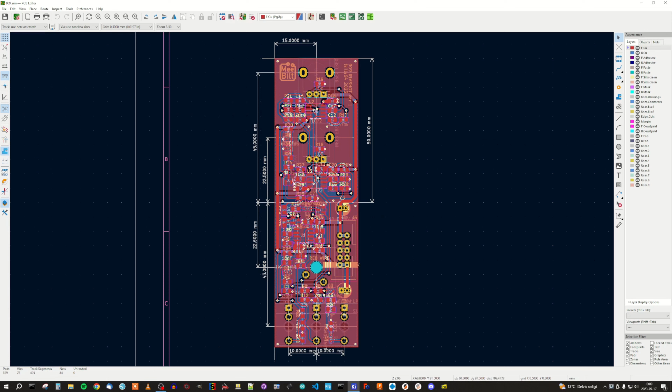And in this episode, we will continue with the front panel. And to do so, let's start by bringing up the design of the board, or the PCB, again. Alright, so I wanted to show the dimensions here of the PCB. This is something that we established earlier in episode 3, I think, floor planning. And let's just highlight the mechanical dimensions here.

Here we have a center point defined. We have 15 millimeters from the left board edge, and we have 50 millimeters from the top, and this is the center. And we will use that as a reference when we make the front panel. Every dimension to the pots and to the key and to the jacks, they are referenced against this reference point here. Okay, so let's close this one.

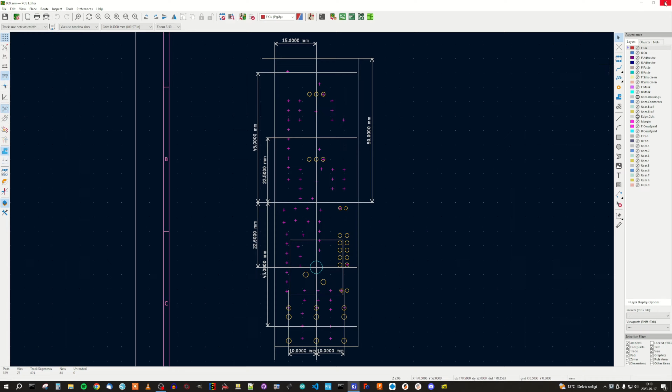And we will create another one. New project. And we will place it side by side with the 909 Rimshot main PCB. Like so. And we open the PCB editor. So here we have a blank sheet that we can use for the front panel.

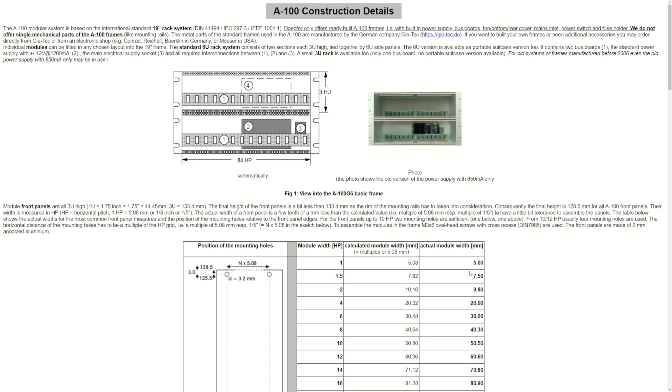All right, before we start, I would like to mention a couple of words about the dimensions of the front panel. And as you can see here on Doepfer's homepage, they say that 3U equals 133.4 millimeters. But in order to make it fit, if you have a card cage that has rails on the top and bottom, which basically everyone has nowadays, the final height is recommended to be 128.5 millimeters.

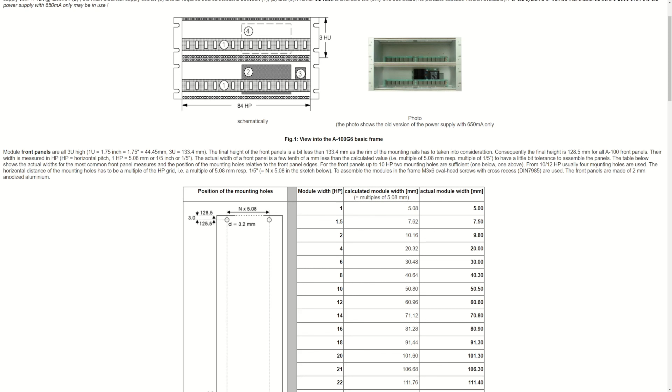And I use a slightly different dimension. I use 128.0 millimeters. And the reason for that is one of my DIY cases, the dimensions didn't get completely correct. So in order to make the modules fit perfectly, I had to make them half a millimeter shorter. But that is not a problem for professionally built cases or if you DIY something using pre-made rails. You can see here that there's a difference between the calculated module width and the actual module width. So in our case, we are using 6 HP, so our panel should be 30 millimeters.

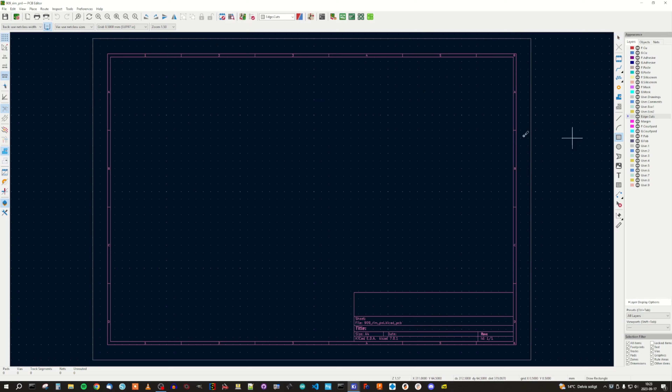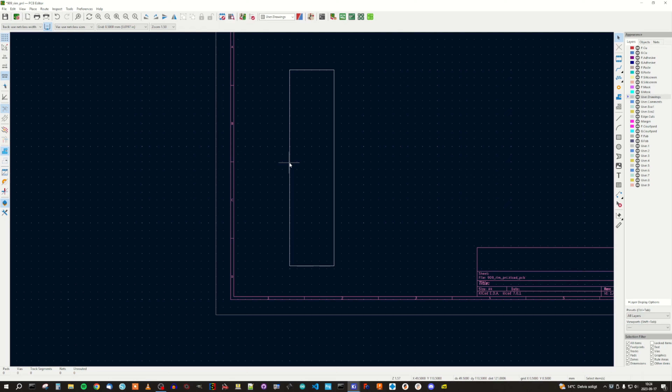All right, so we are back into the PCB layout again. So we are going to start designing the front panel, and we will start with a board outline, which means that we will select edge cuts, and we want to draw a rectangle that is 30 by 128. So this is what our panel will look like. And the next step is to basically copy the dimensions from the drawing I showed you earlier on the main PCB. So let's start doing that.

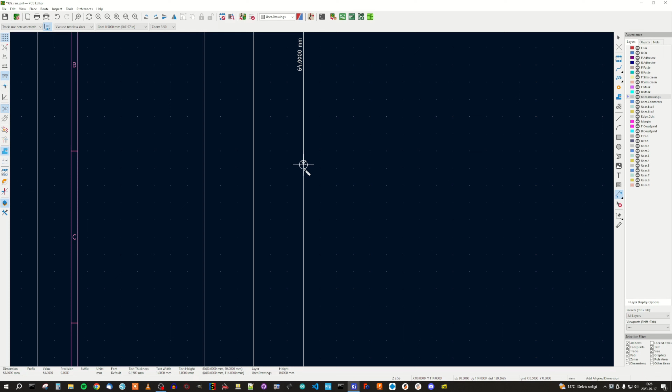And in this case, we are not using 50 millimeters height, of course, because the PCB was 100 millimeters and half of that is 50. But half of 128 millimeters is 64 millimeters, so we will use that. So this intersection here, this is the new reference point for the panel, and it will match perfectly with the PCB, and the PCB will be centered between the top and bottom. So let's continue with the rest of the dimensions.

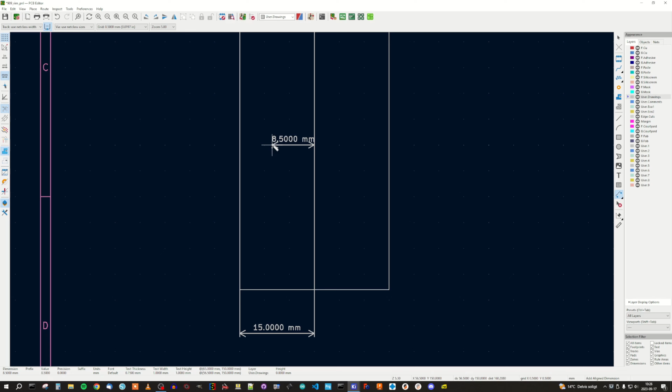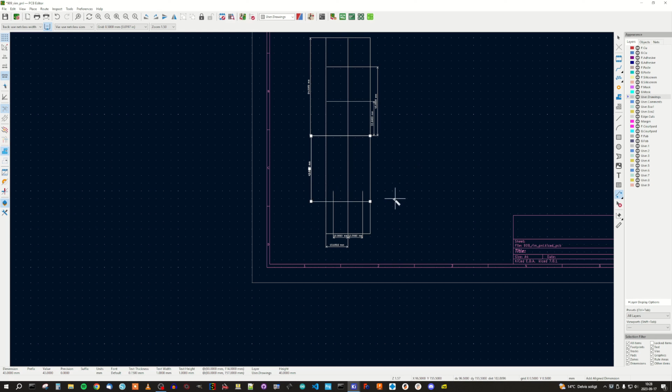For example, we have the jacks down here. And we have the center point for the first pot. And for the second pot. And we have the jacks. And finally the button. Okay. So let's have a look at what we have done so far. So we have a panel, but we don't have any holes in it yet.

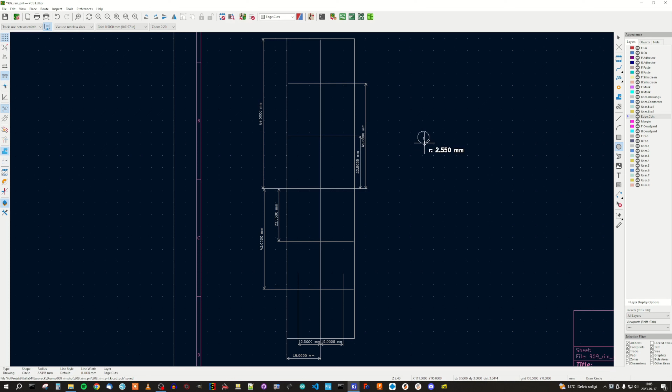And there are a couple of different ways of doing this. One way is to use the edge cuts layer here, and we can draw different shapes, holes and whatnot. And we can place them into the design like this, and that will produce a hole, and that is a perfectly valid way of doing it. But I prefer to make footprints, because I probably want to reuse them. If I make something for a Thonkiconn jack or for a pot, then I will probably want to reuse that in other designs. So it makes sense to make a footprint for it.

And the way I do that is to go into the footprint editor. And what I will do here is to create a new library. That will be global, of course, since I'm going to reuse it for a lot of other stuff. Like so. And then we have this library over here. And we can start populating that with footprints.

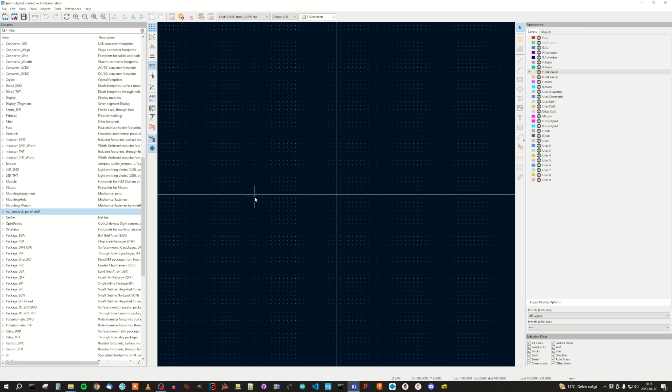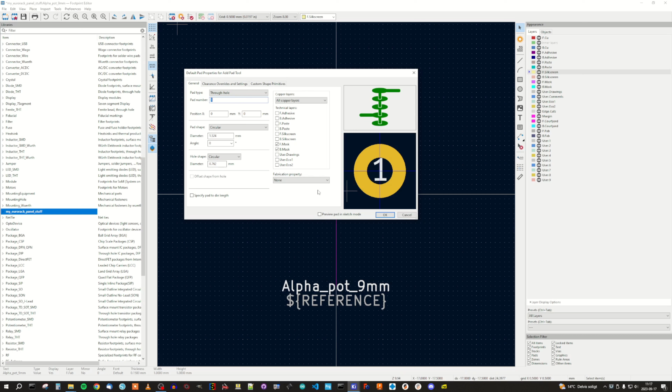Okay, so we will start by making the hole for the pot. And we call that Alpha, like so. Move this a little bit. First, what we want to do here is to add a pad for the hole, and the type should be non-plated through hole, mechanical. And we will actually have the same pad shape as the hole shape. And the dimension for the pot is 7.2 millimeters. And we do the same here, like so.

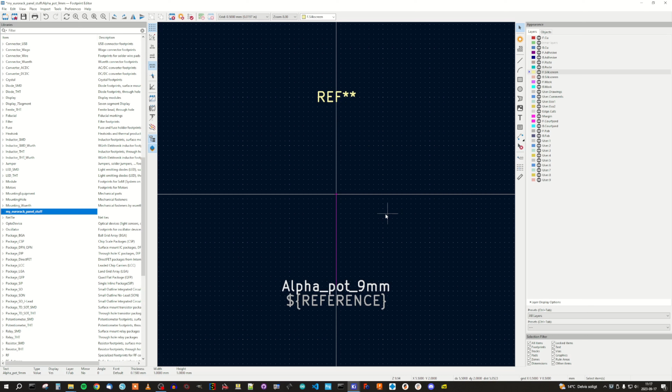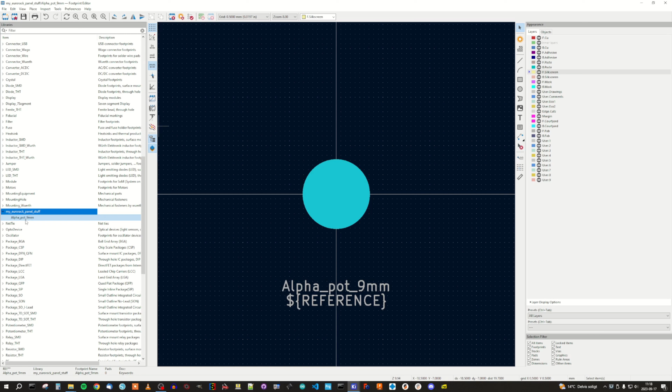Like this. And this reference on the silk print, you can remove that or mark it as invisible. And you do that by removing this tick here. Okay, so now we have created our first footprint. Let's save that. And you can see that we have it here in our library now. And let's continue with another one.

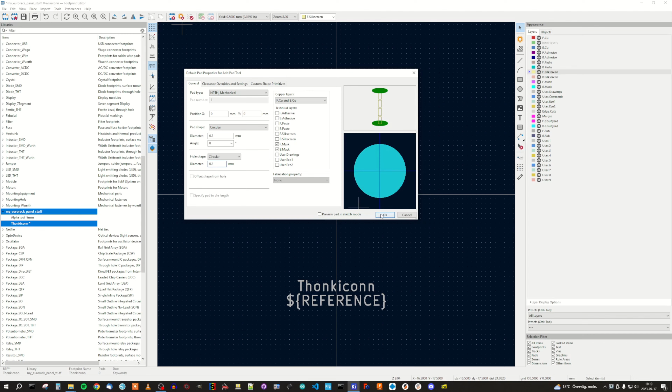In this case, we want to have the Thonkiconn jack. And we do the same thing here. We can make that invisible. And we add a pad. And in this case, it should be 6.2 millimeters. And let's save that. Okay, so in our library, we have two footprints here. And we will need one more, or at least two more, I would say. One more for the Cherry key, the key top.

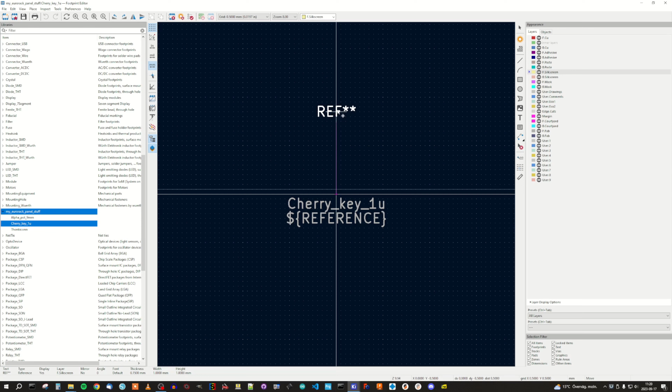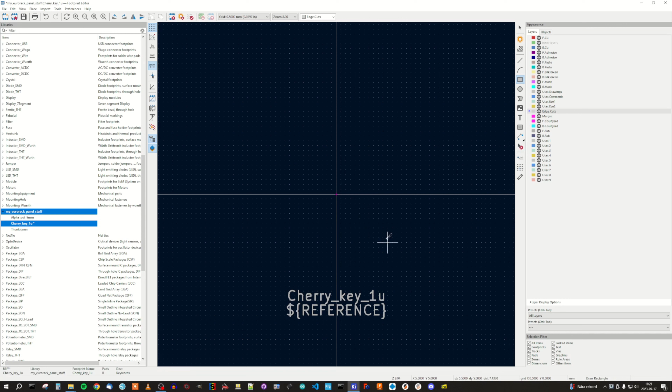Okay, we can change the visibility of that. So the dimensions for the cherry key is, let me see, 19 times 19 millimeters. So what we are going to do here is we are going to draw that in the edge cuts using a rectangle like this.

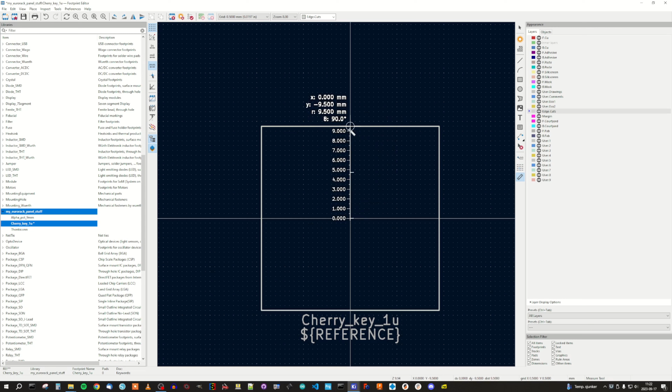And what I want to do now is to center that around the cross section here. So we will move it. That is okay. We can do some measurements. 9.5 millimeters from the center. Yep, that's correct. Same here. 9.5, 9.5, and 9.5. Okay, so we are in the center here.

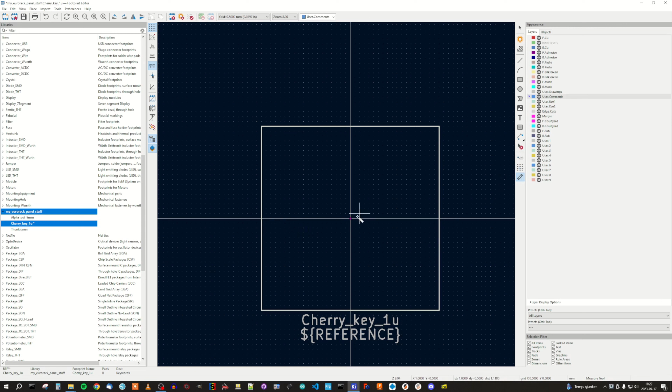What you can do if you want is to add a sort of cross here to make the placement easier. So we can do that as well. So we will just draw a small cross here. Okay, so I think that's it. Let's save that. Okay, so let's continue with the last one. And that is the hole for the screws.

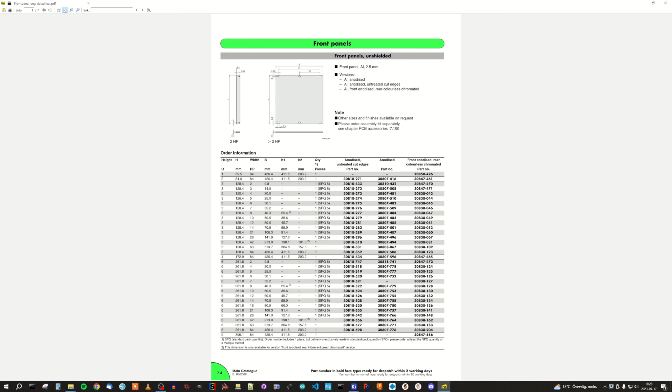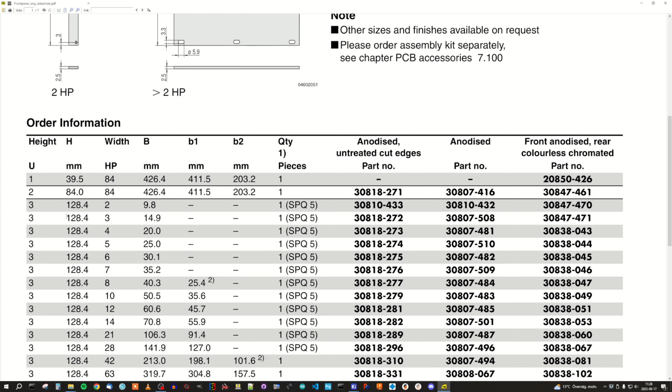Before we continue, I would like to show one thing here from a manufacturer called Schroff. This is a standard called Eurocard, and that is basically the same standard that Doepfer have derived the Eurorack standard from. And so the dimensions of the panel, they look very familiar. This says that 3U is 128.4, but that is basically almost the same as the figure from the Doepfer site.

So what I wanted to show here is the dimensions of the hole in the front panel that Schroff are using. These are the ones that I have sort of copied. So the dimensions here, basically it's 3.3 millimeter height, and the width is 5.9 millimeter, and the placement is 3 millimeter from the upper or lower edge of the panel, and 7.45 or 7.5 millimeters from the left side or the right side, depending on which location you have the hole for the screws. So that is what I'm going to use.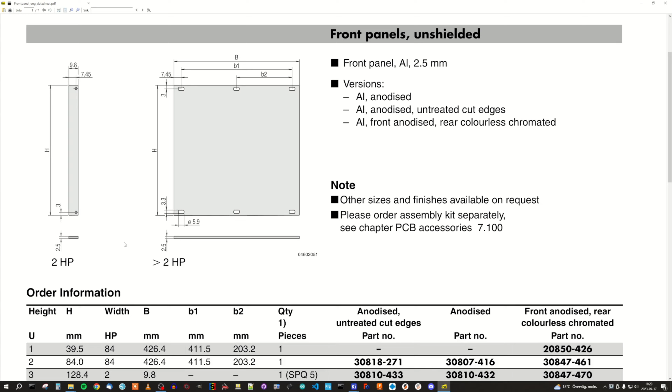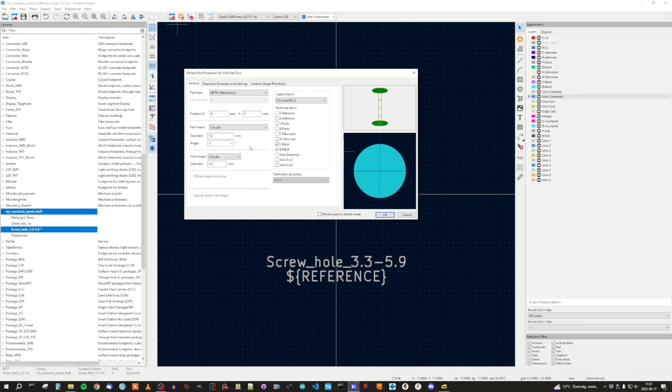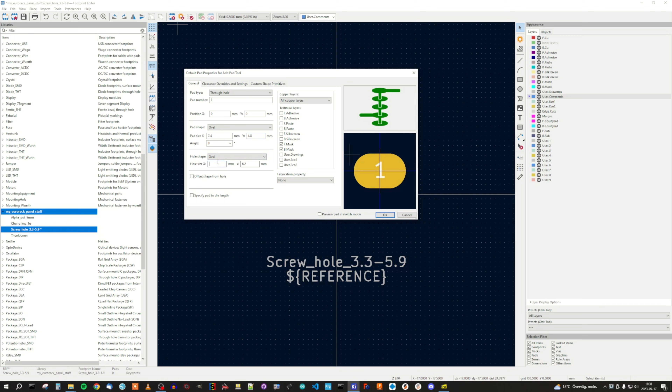Okay, we are back in the footprint editor, and we create a new footprint, and we can call that screw hole 3.3 5.9. All right, so what we are going to do here is to create one pad, and this one will actually be a through hole, and we will make an oval shape like so, and the pad size should be 7.4 times 4.8, and the hole shape should be 5.9 times 3.3, and then we have something that looks like this. And place it, make sure that we place it in the center.

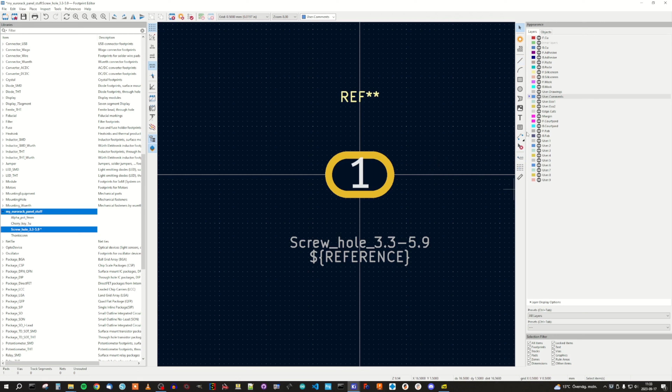And I also mentioned that we want to place this 3 millimeters from the upper or lower edge of the front panel, and 7.5 millimeters from the left or right edge. So I will actually add a couple of brackets here to make it easy to place this in the correct position. And I do that by using the user comments again. But first of all, I need to have the dimensions. 3 millimeters like this, and we have 7.5 millimeters. Okay, so now I have the dimensions, and the reason I'm doing this, it will be clear in a second.

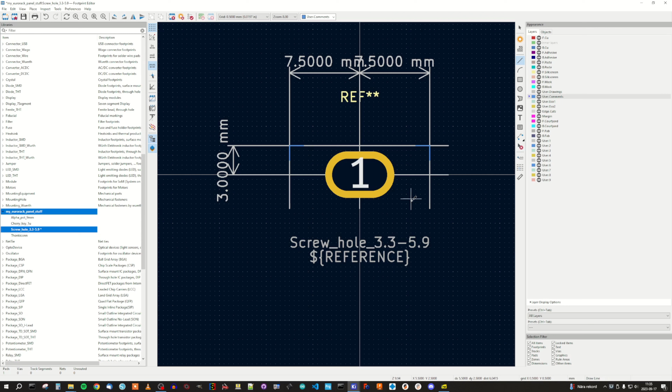Okay, so what I've done here is 2 brackets that will align with the board corner of the PCB, and depending on if you rotate this, then you can place it in the upper or lower part of the front panel. I will show you later what I mean when I add this footprint to the actual design. All right, so I think we're done here. Let's save this. Can make a check. Everything's okay. All right, let's go back to the PCB editor.

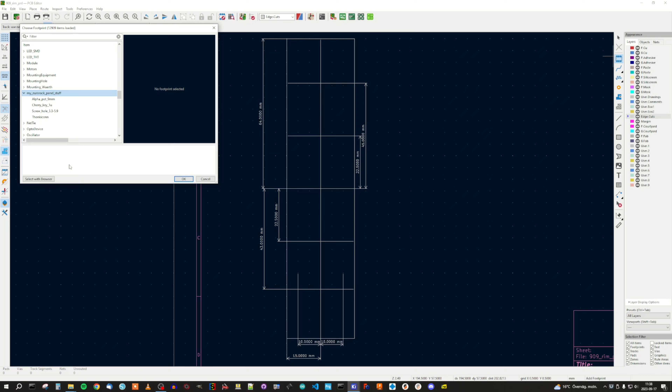And here we have our design again. So let's add some footprints. And then we can go down to our library here, my Eurorack panel stuff. That was the footprint library that we created. And we want to add the alpha pot 9mm for that, like that. And we need a second one.

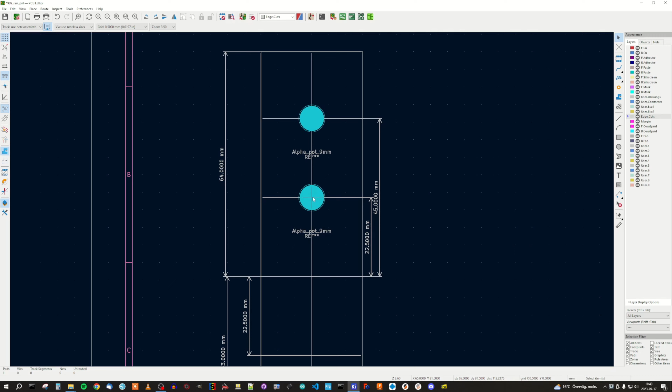One thing I want to mention here is that you can actually add a lot of things to your footprints. For example, if you want to have a scale here at the pot, or you want to have a sort of rendition of the knob itself. Let's say that we have a 16 millimeter knob, then you can have a ring outside here with 16 millimeters that shows how much of the panel is actually covered by the knob itself. So you can place the text on the front panel in the correct position. There are a lot of things you can do here, but I am just showing the simplest version in this tutorial. Okay, so now we have the pots, and we can look at that in the 3D viewer. Here you can see the holes.

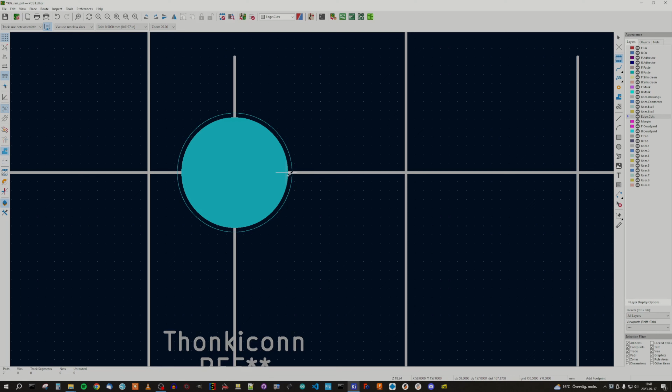Okay, so the next step is to add the Thonkiconn jacks, I think. So let's do that. Thonkiconn. We do the same thing here. Make sure that they are properly aligned. Like so. We can save that. Yeah, it's starting to look like a panel, actually.

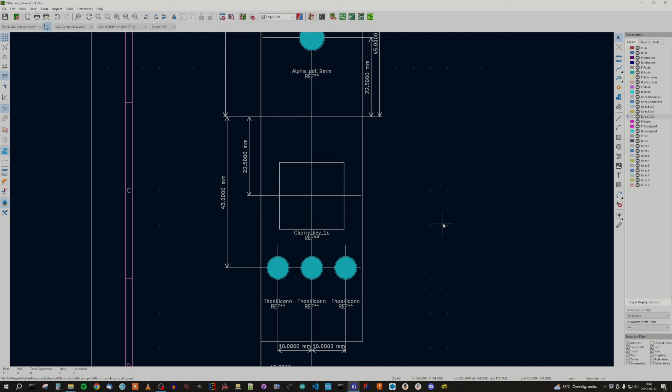All right, next step is the cherry key. And here you can see it's quite convenient to have that cross mark like so. Let's have a look at that. Yeah, that looks okay. And finally we have the screw holes for the panel.

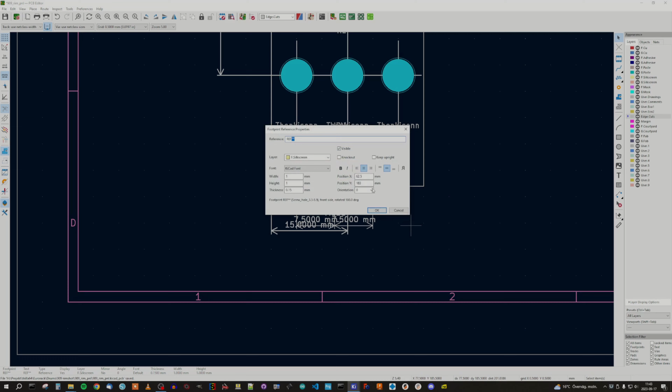Okay, so this looks a little bit messy, right? First of all, I forgot to turn off the reference designators here, and that's where we can actually do that. So let's have a look at this. This is not right, so let's fix that. You see I aligned it to the wrong cross here, or edge.

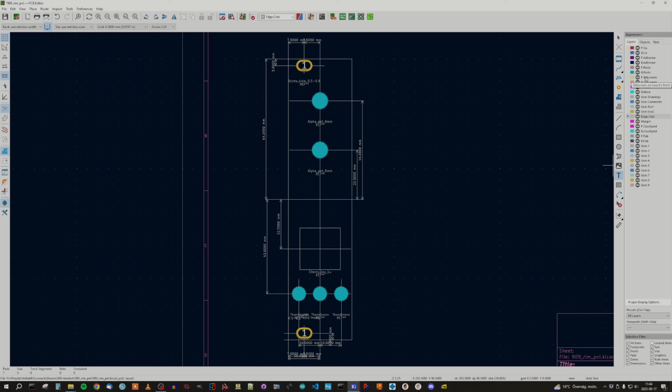First of all, you have to select the correct silk screen, and in our case this is the front silk screen that we are going to use. And then we can add some text, for example trig in, and I think we want to have the text something like 1.3 maybe. Let's see how that looks. This is basically how you do it.

I will show you another thing, and that is the font I'm using is kind of Roland inspired or specific. And it's actually a TrueType font that I have installed. It's called JX8P, and it looks like this.

This feature that you can use a custom font or a font that is defined in your system, that is something that is specific for KiCad 7 and later releases. So if you are still using an older version of KiCad, you cannot do this. In that case, you have to use the default KiCad font.

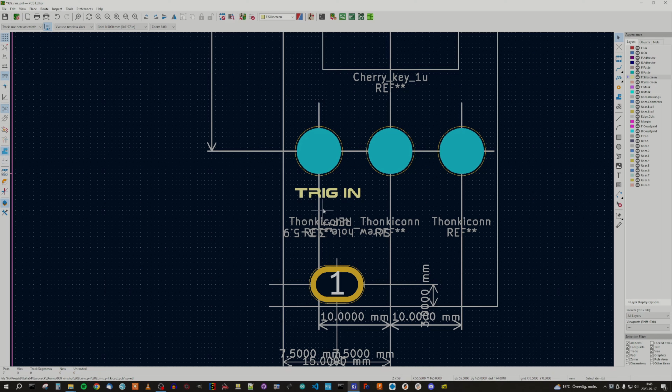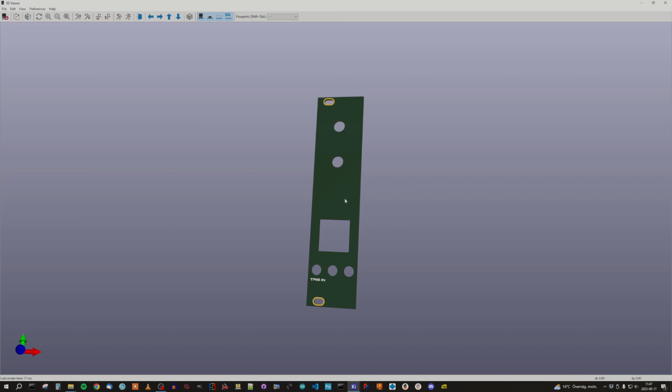So yeah, basically this is how I make my front panels for Eurorack modules. I will finish this up, and then we will have a quick look at generating the manufacturing files. Okay, so this is what the design looks like when it's finished. And I added the logo, and I also use a box around the output, just to mark that it is an output signal.

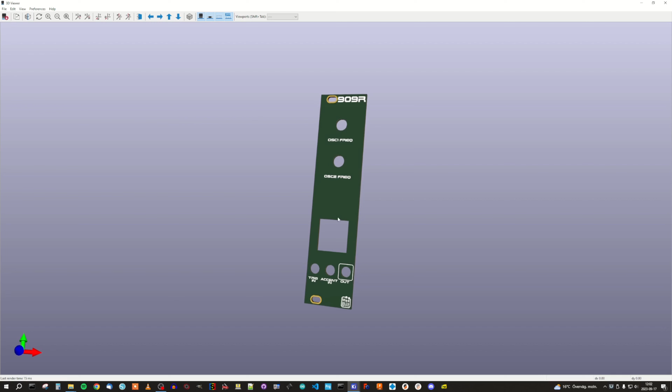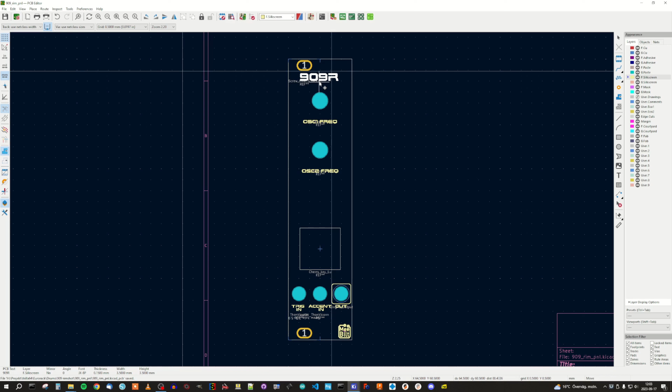And I'm not completely happy with this. I think I have to reconsider placing the name of the module like this. I've done it like this on the other modules I've done so far, but maybe this is not a super good idea. What I would like to do is maybe to move it down here, like this. And of course I would like to call it 909 RS for Rimshot. Maybe this is a nicer way of doing it.

Okay, so let's have a look at how to produce the manufacturing files. And it's very simple. We'll just do a DRC check, save that, and then we press the fabrication toolkit. And then we have the Gerber files, and that is all that we need for this. What you need to do is to take this to your preferred PCB manufacturer and order the PCBs.

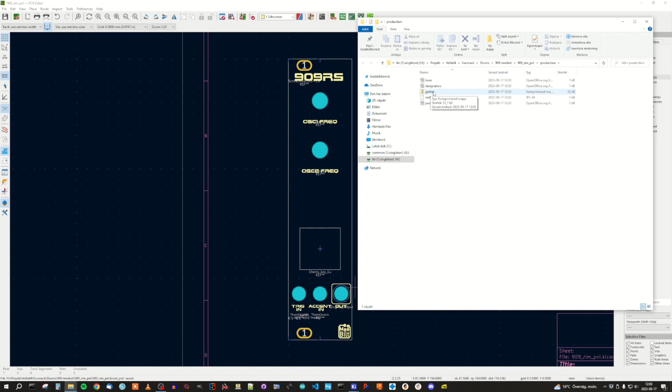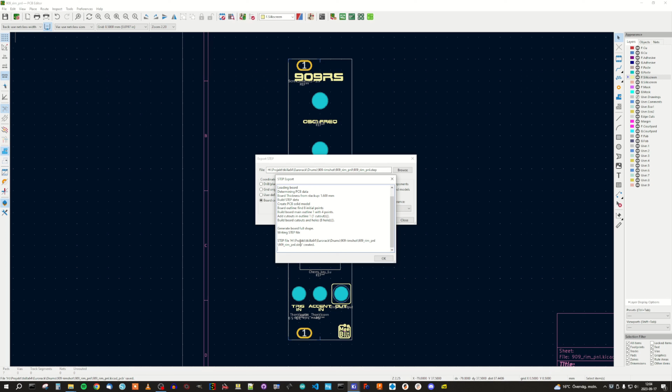And while you are waiting for the PCBs to show up, there is actually a trick that you can use to get a sort of prototype front panel, using your 3D printer to print one if you have a 3D printer. All right, so the way of doing this is to export a STEP file. STEP is a file format for 3D models, and unfortunately my 3D printer does not accept the STEP format right away. So what I have to do is to use a 3D CAD program. And in my case, I'm using FreeCAD for this.

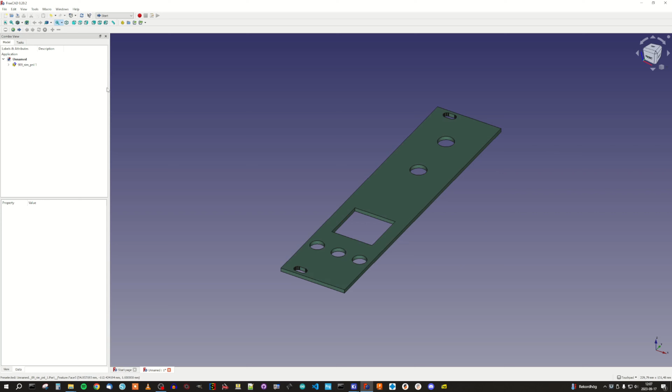Okay, so here we are in FreeCAD. All I need to do now is to import our STEP file. And this is what it looks like in the CAD. As you can see, we are losing the labels or silk print. But this is okay for 3D printing. So what I will do now is to export this as an STL file. Like this.

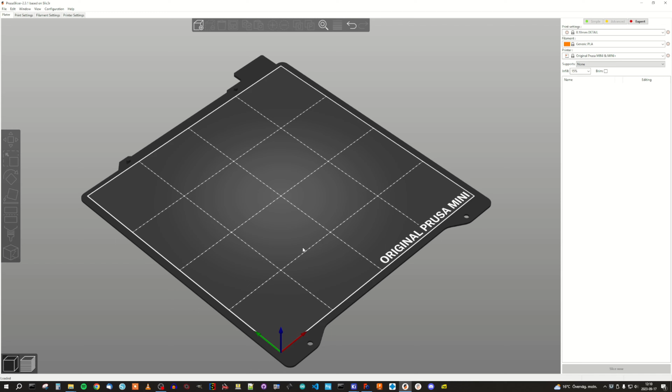Okay, so now we are in my slicer program. This one is specific for Prusa, or you can use it for other 3D printers as well. But since I have a Prusa printer, this is the one I'm using. And what we can do now is to import the STL file. And here you can see the front panel placed on the print bed.

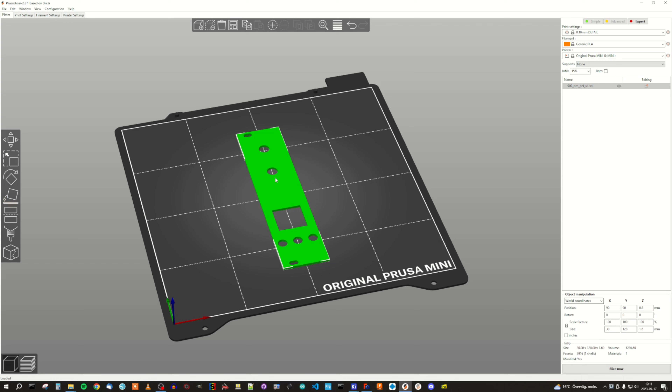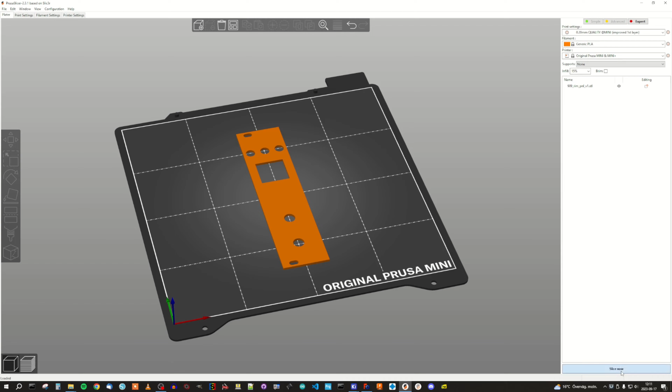And this is the front side, and I want that to look nice, so I place that towards the print bed. That is the simplest way of doing it, like so. And now we can select a nice profile. I have this special profile here where I print the first layer very slowly, so it will look nice. And I will print in PLA, so that's that. And here we have it sliced, and I will save that to my USB stick, and we can put that in the printer.

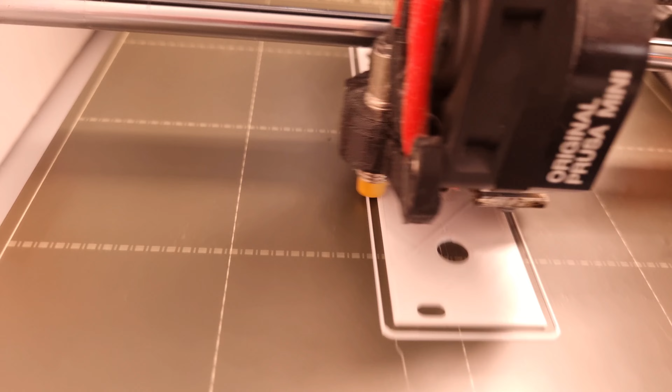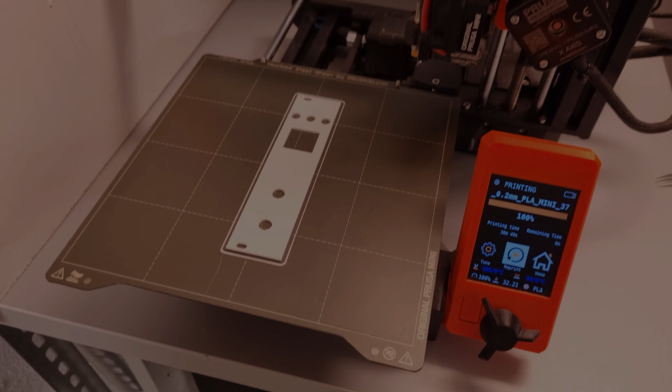The 3D printed part might need a bit of cleanup, so the pots and jacks fit into the holes properly. So I'm using a deburring tool for that. In the next episode, we will assemble the PCB and put everything together, so stay tuned for that.